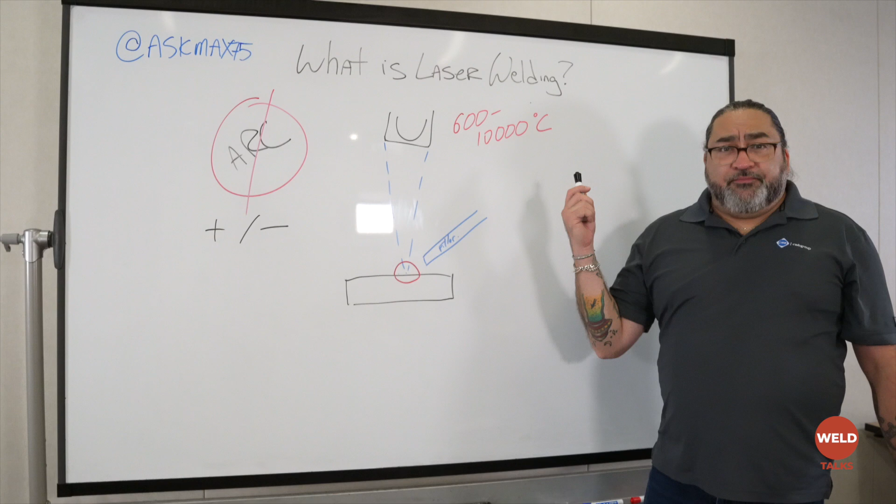One of the great questions we've been getting lately is, what is laser welding? I want to do a quick video here to explain some of the ins and outs of laser welding, how it works, and whether you're going to see it in your shop.

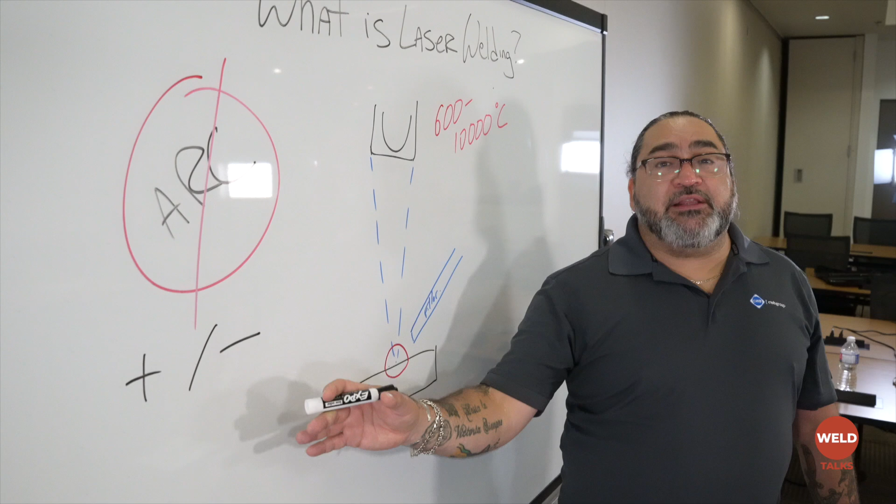Right off the top, I want to make it clear that laser welding is not an arc process. So we don't have any positives and negatives, no DCEP or DCEN. We're not running a MIG, stick, or TIG process where we're using electricity coming through the plate. It's completely dependent on the heat coming from the light source.

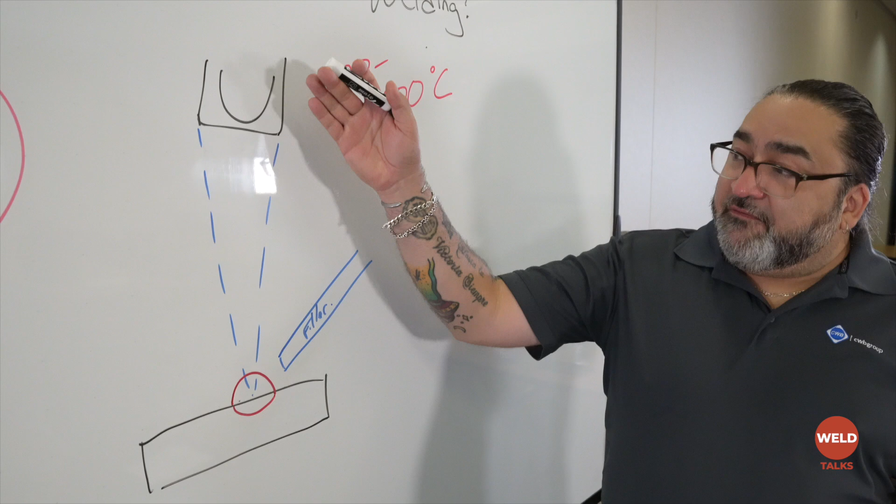In this case, the light source is a high intensity laser. It can be made out of a couple different materials, but at the end of the day, we have a very hot laser beam of light coming out and onto the plate. Now we know light can be hot — we feel light from the sun, from light bulbs, lights all around us, and it creates energy.

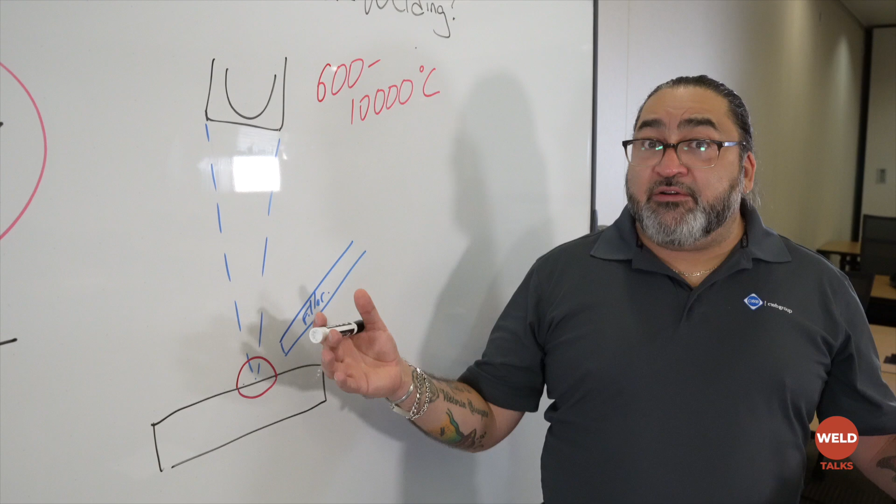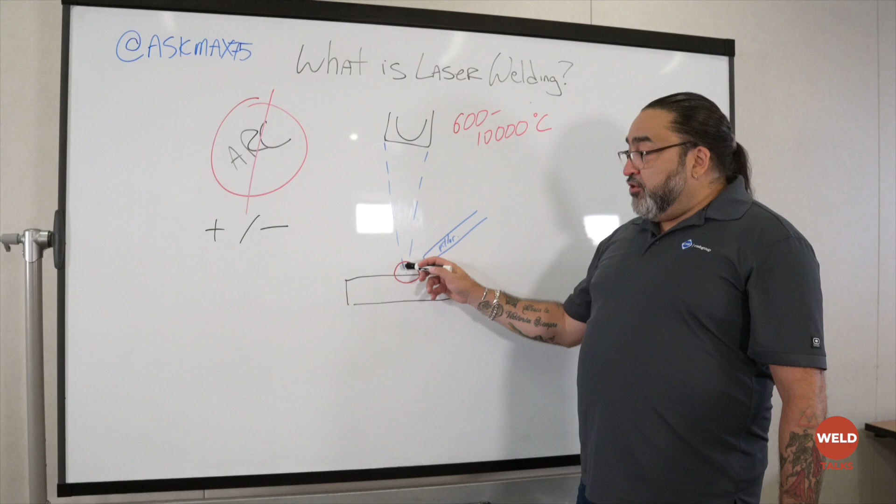A laser beam is an intense directed light. As soon as it comes down, that heat energy from the light is hot enough to create a weld pool. That'll cover almost all materials, including glass, ceramics, plastics, aluminums, nickels, tungstens, just about anything you want.

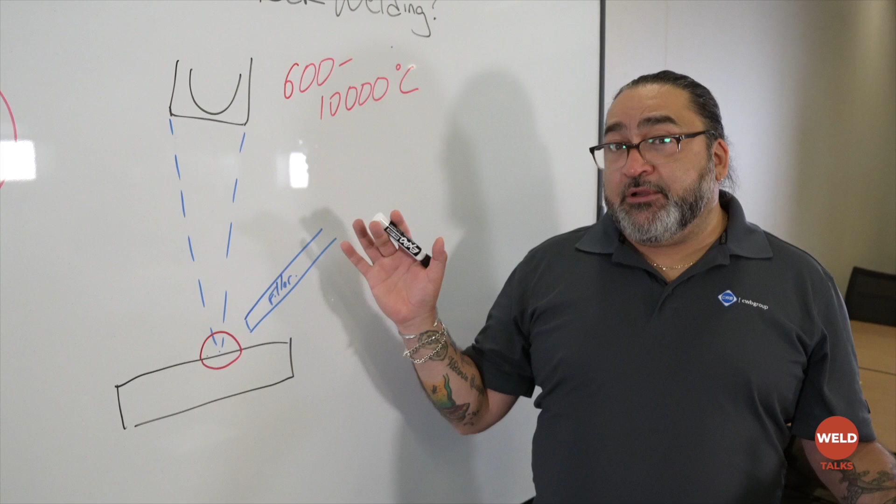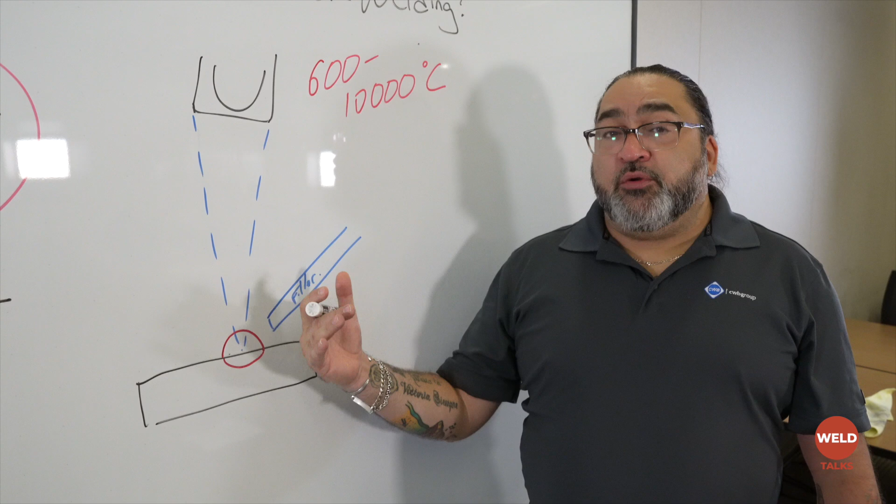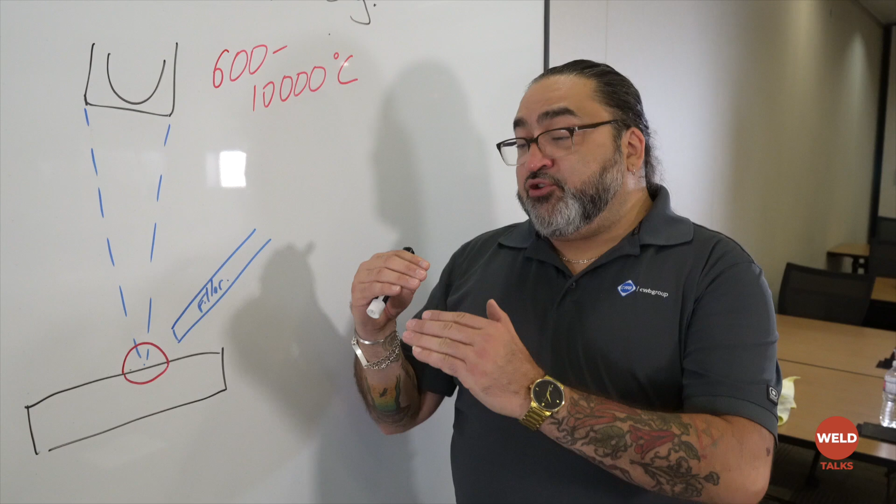One of the great things about laser welding is that because you can dial in the temperature so specifically, you can actually weld dissimilar metals really well — copper to aluminum, copper to steel, things that are very difficult to do with normal arc welding processes. With laser welding, it gets much easier. You're able to dial in the temperature perfectly so that the plates will melt at the right time and join together without any issues. In terms of pros and cons: pros, it can weld almost any type of material.

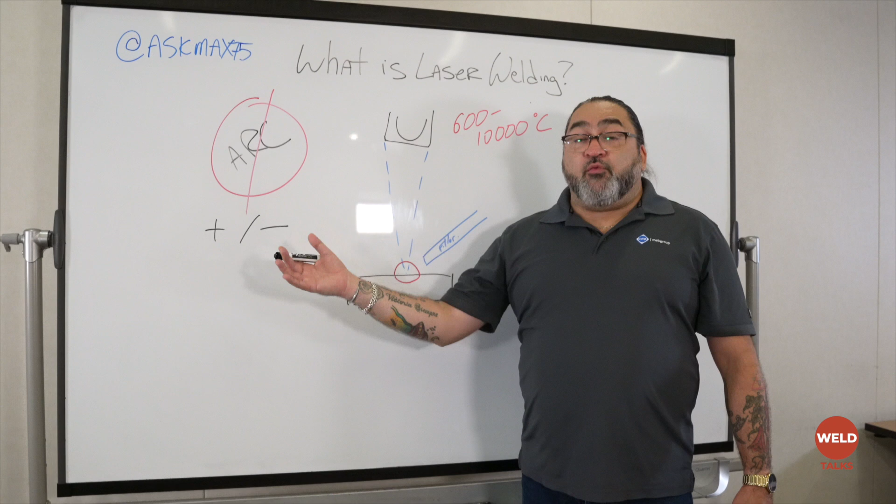Also, the price has come down significantly. Three years ago, I remember seeing it at a conference, and it was extremely expensive and hard to find. Now, almost every supplier in Canada has one they can sell you. They're easy to run, they can run off 110 to 220 low voltage formats, and the cost has been reduced significantly. What are the cons?

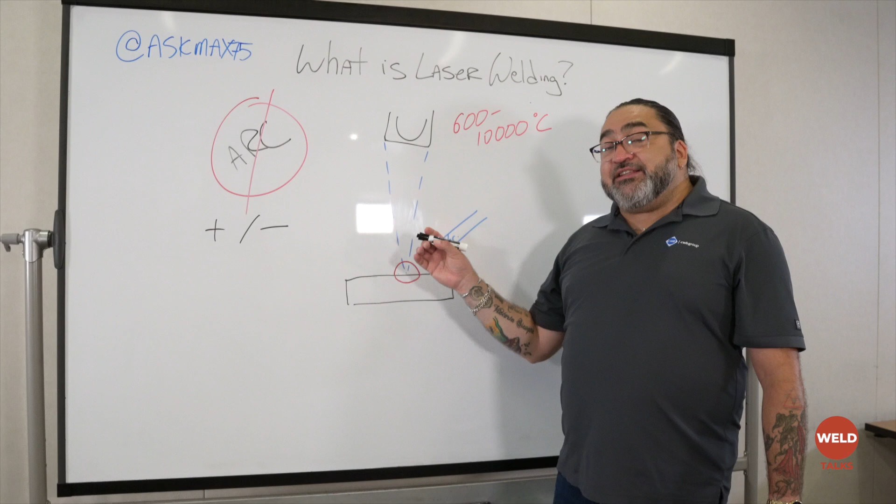Well, the cons are, like any light, you've got to worry about reflection and refraction — that means light either bouncing away or bouncing towards you. Light can be dangerous when bouncing, but think about a laser light that can create up to 10,000 degrees Celsius — it's a lot more dangerous. So you have to be careful about the safeguards in place, where the light's shooting, the type of material you're welding on, how reflective it is, and where it's reflecting to. Always be extremely safe about laser welding because the light has such intense heat that it burns very quickly.

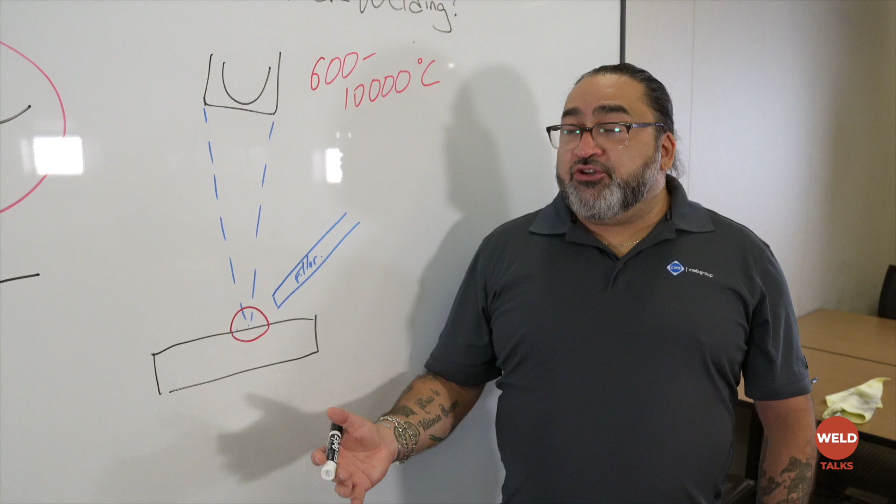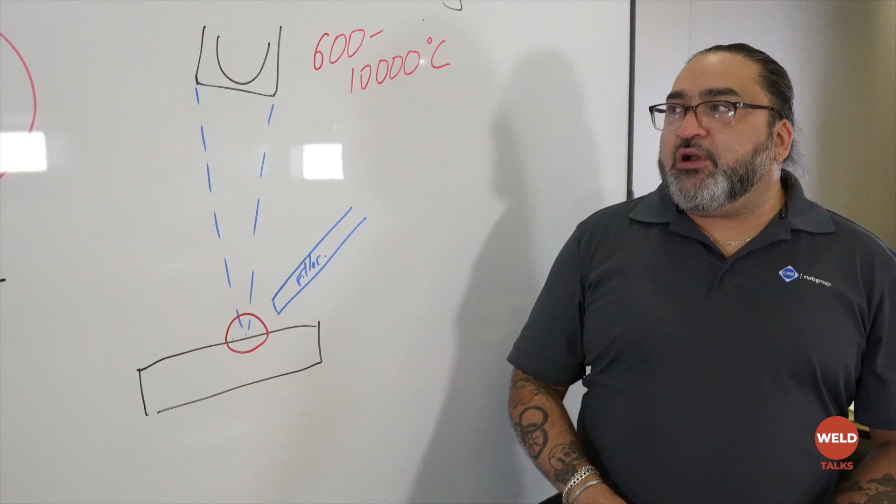Are you going to see a laser welder in your shop anytime soon? Well, I think so. The cost has come down significantly. We used to see them only in large manufacturing processes, but now you can get a reasonable machine that'll plug into local power sources at most suppliers. If you're interested in learning about laser welding, reach out to your local supplier — they likely have a machine or can get one for you to try.